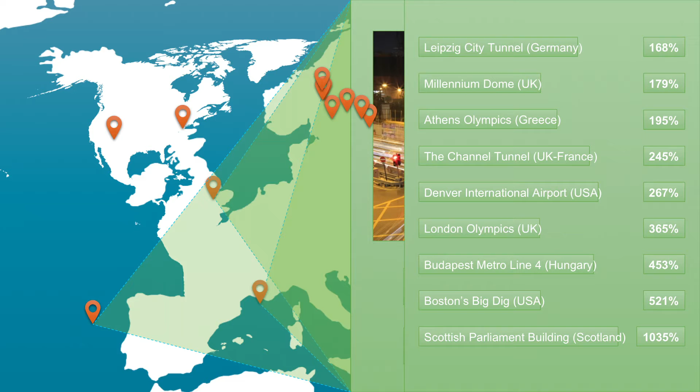This problem is not unique to Canada or the US - it's a global problem. We can see around the world a few examples of projects that are way over budget: Brazil, China, and the list goes on. We'll take a look now at a list across the world - some really incredible budget bust numbers here, and this is just not acceptable. We know that owners expect better from the construction industry.

But things are starting to change, and BIM is driving that change. New technologies available for construction are making new things possible that in the past have been impossible. Today we're here to introduce HxGN SMART Build, the newest BIM construction 4D, 5D solution that brings together models, schedule, and cost all in one pioneering platform that's brand new to the industry. We'll release the solution in about 3 weeks, so you're seeing a sneak peek here today. The solution has 3 pillars.

The 3 pillars are: one is clarity - it's role-based so everybody can see exactly what they should see at any time. Connectivity connects together all parties so that we can see the information that we need to see, all in one single interface.

Simplicity - we're lowering the barrier of entry to BIM by creating a solution that's easy enough for everybody in the entire project team to use, whether it's the owner or the tradesman, but sophisticated enough for the most sophisticated scheduler or cost estimator and project manager to use.

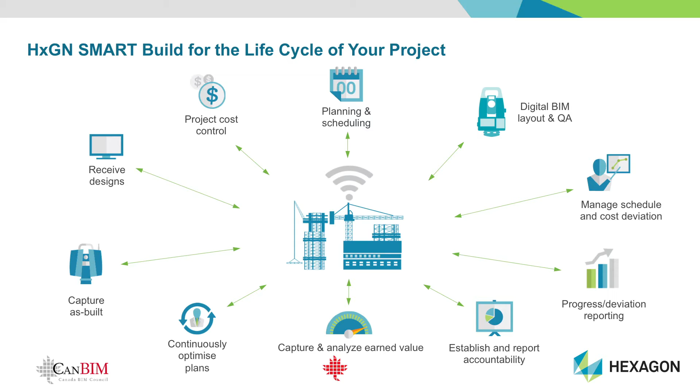Our solution is built from the ground up, brand new technology we're bringing to the market. It's all about using the Internet of Things to connect together all parties so that all information is in one platform so everybody has the information at their fingertips at any time. HxGN SMART Build is a solution for the entire construction process, from early planning to execution, including digital construction layout that's fully integrated, all the way through the handover process.

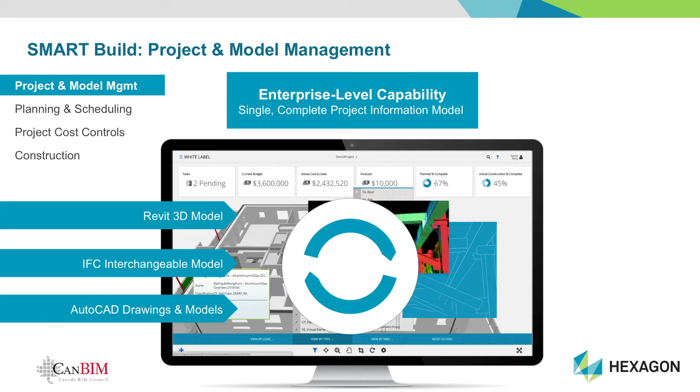Let's take a quick run through a construction project. Phase 1 is pre-construction planning. In pre-construction planning, we consume or import multiple different models into a single environment. Once we have all the information in the same place, that information is combined together, and all the other project information can be brought in as well - whether it's 2D information, Word documents, everything is pulled into the one single same environment.

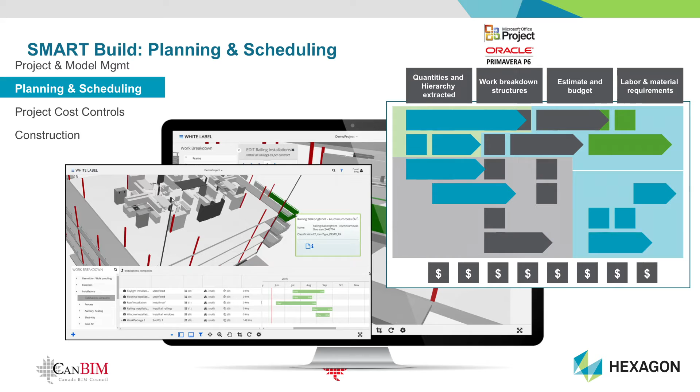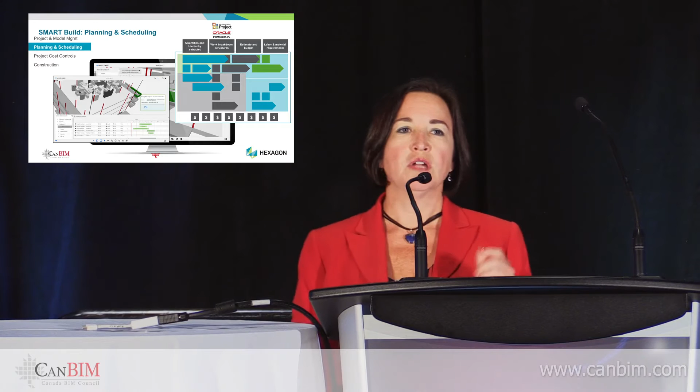The ability to bring everything together in a web-based environment means that everybody has all the information at their fingertips. But because it's role-based, you only have the information that you need - you're not overwhelmed by information that's irrelevant to your role.

And now if we move to the takeoff process during construction, in pre-planning, we have the ability to pull model quantities directly from the model within our solution.

Once you have the model quantities, you can apply formulas. You can use your very own formulas, and we have a database that will manage that process. And those quantities can then have cost applied as well, and we can manage that whole process.

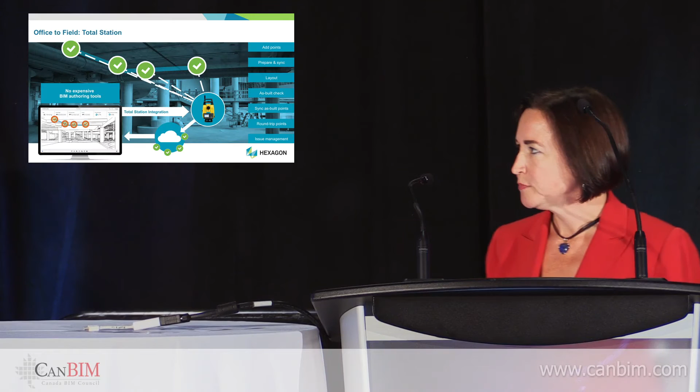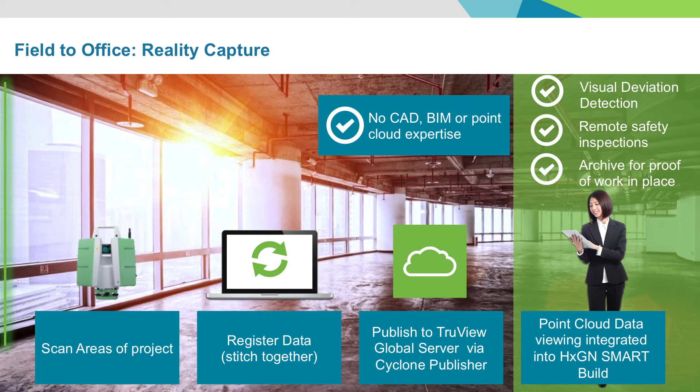And now we can bring in our schedule. You can bring in a schedule from P6, Primavera, or a Microsoft project, or virtually anywhere, even in an Excel file. Now that you have all your information in one place, you can pull together your model elements and schedule elements into what we call a work package.

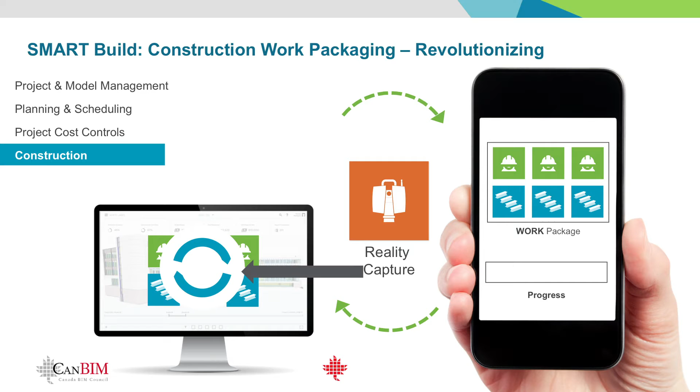The work package is the vehicle that ties together your model elements, your schedule, and your cost in one vehicle that allows you to assign out these work packages. And the work packages are breakdowns of your building, so you can divide it up by floor, area, trade, and then those work packages can be assigned out to the trades, and once we get to the field, they can be statused.

So let's move on to construction execution. Now we're in the construction execution phase, and we have real-time dashboards.

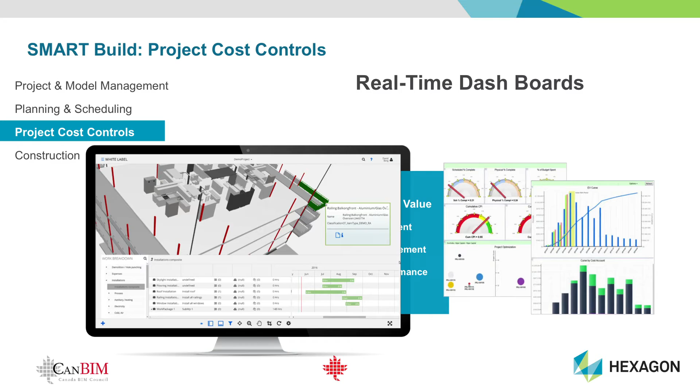As construction is progressing, we can see in our same model environment our earned cost or our earned value. Because we've pulled together in the very same environment your model, your cost, your schedule, we can see earned value on our dashboard in our model view environment.

It's not just a pretty picture, guys. You can click on any of those metrics, those KPIs at the top of the screen, and drill in and get all the information about your project. RFIs, COs, where are we, who's behind, why are they behind?

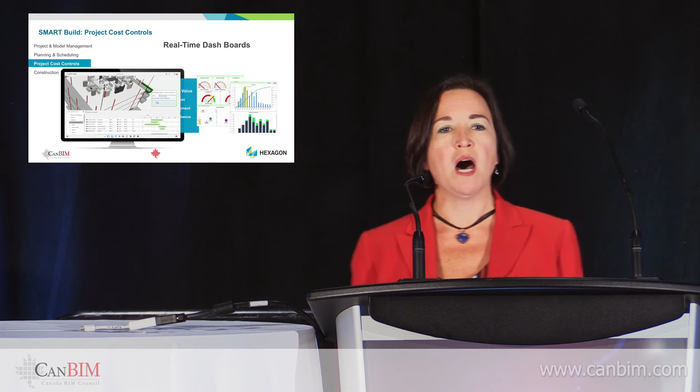So very rich data. We also integrate with digital construction layout. Within our model viewing environment, you can add construction layout points to your models, sync those with your robotic total station software, and layout in the field.

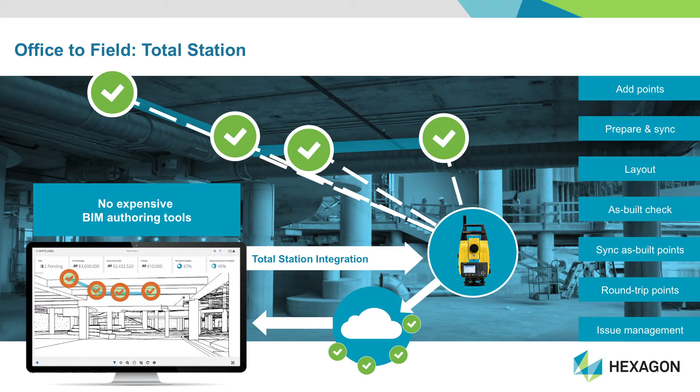And you can also as-built in the field and round trip those points right back into the Smart Build environment with deviation detection. Once you're back in the Smart Build environment, all that information can be shared out with the team with integrated issue management.

As part of our ongoing development, we're also integrating scan data or reality capture data, where this information in the field can be captured and your model information at the same date and time can be exported out and merged together with your model and your scan data, then viewed within this model-based viewing platform, cloud-based, for visual deviation detection, remote safety inspections, or just proof of work put in place.

Now, once we're in the field, we have our work packages generated, they've been assigned out to our trades, and now in the field with practically any mobile device, these work packages can be updated or progressed on a daily or weekly basis. As soon as they're updated in the field, the progress is reported, and that information goes right back to our dashboards, providing project managers and owners with instant information about the status of the project.

Our vision is that moving forward, reality capture will be integrated into this process so that trades will have to provide evidence of work put in place and also the quality of the work with reality capture data such as scan data.

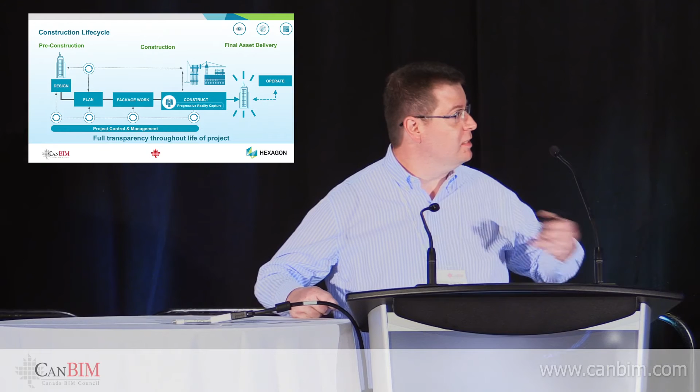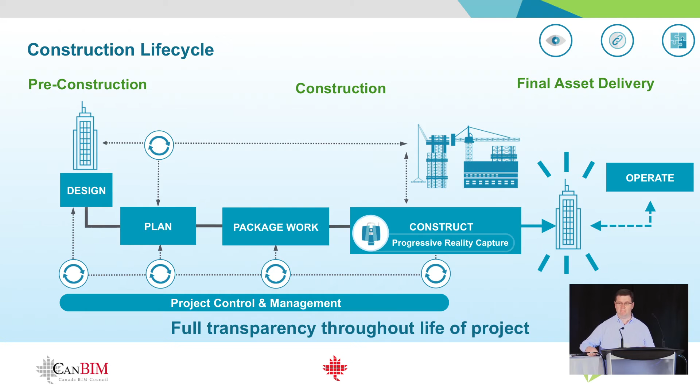Basically that's the diagram of the process that she described, right? So basically you have the design, then you plan, then you create the packages, and you leverage these packages to actually do the construction and track all the progress, right? And once the work is done, you can use that to operate the facility as well, so do all the asset management required. And all that, through all the phases, you see that you have project control and management as well. So you can leverage via the dashboard that she mentioned all the costs and all the tasks or activities that are related to that. Okay, so this is a quick overview of the solution.

So you see on the top here the dashboard, right? So you basically define your KPIs, so you can define your own, right? We're just giving some examples here. And then on the left side, basically really simple icons of the things that you want to do, right? So work packaging, recipes is the idea that you have a library of things that you execute in different projects to reuse, right? So digital layout, documents, tasks and export the quantities, right?

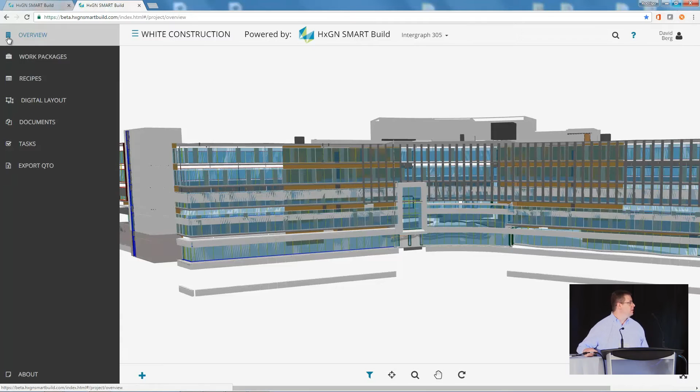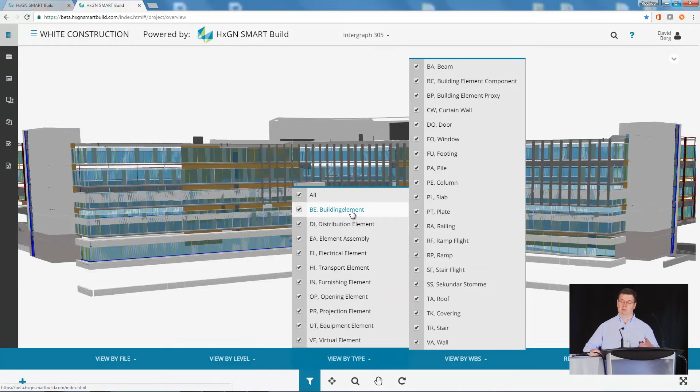On the other bar, you have basically different ways of filtering information, right? So we are leveraging IFC files coming in from the design tools, right? And then we can filter that based on several different things, even custom filters that you can create on your own, right? So some examples here: defining the levels, defining based on the classification of the items, WBS, WBF, so on and so forth, right?

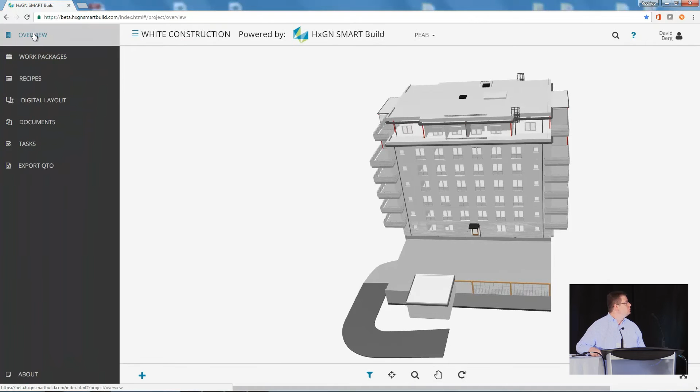So once you have this idea of filtering your model based on specific information, you can now leverage this classification to define your packages, right? So I'm going to the interface that defines that. Basically just setting the environment here. So you see that I have a list of packages based on some classification here, and each of them is associated to a WBS and some items in the schedule. So you can see the planned dates and the actual dates as well, so you can basically track if you are behind or not in some specific activity, right?

So we can also track not only the activity itself, but all the material related to that and labor as well, right? So items that are not in the model, right? So labor required to execute that and material that is not in the model.

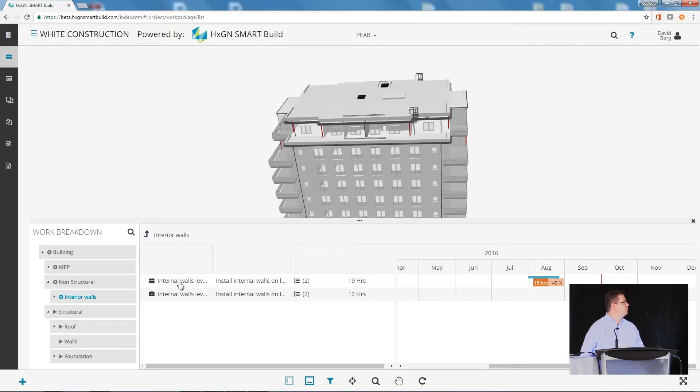So I can drill down to specific areas and go to packages on that, right? So I'm going to the walls here, getting some dates, and then you can see that I have the progress of the specific package, or I can roll up to higher levels to have a more generic, let's say, progress, right? So you see that you have dynamic bars here that we can move according to what's actually happening in the field, right? And as soon as I change something, you see that it automatically calculates the overall progress for that activity, okay?

So I can also define, just give some examples of the properties that I can define here. So for each one of the packages, I can read the schedule, right? Based on Primavera or Microsoft Project or even Excel, right? For each one of the packages, I have all the components, so I can basically graphically select the components or use graphical filters to speed up this process, okay?

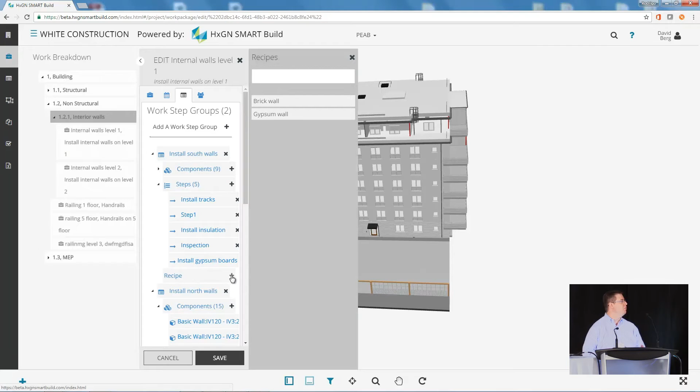Each one of the packages will have a set of steps, so predefined tasks that you have to perform. And one of the things that you can leverage is this concept that we have of recipes, right? So the idea that I've executed that before, so I have an idea what's the labor involved, all the material involved, and I can basically tweak that to improve my process on the later projects, right? So to use that again as a library or a source of knowledge, to optimize the whole process.

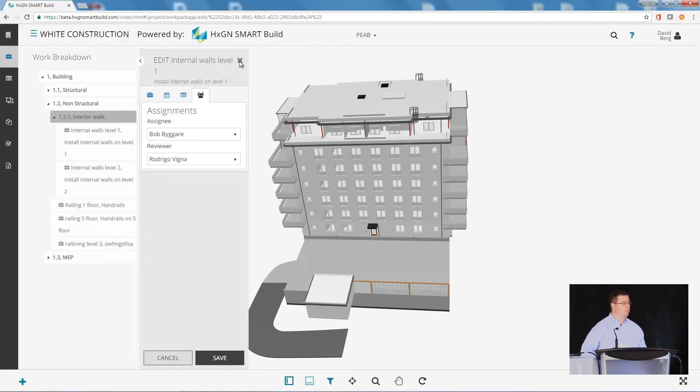We can associate documents into that as well. And we can also say it's a concept of a workflow, right? So basically, a certain user is covering that task. After it's done, somebody else will revise that. So have an internal workflow on how the things will be managed on that process.

Okay, so just showing that again, that I can update my progress and see the values updating on the screen here. Okay, so as soon as I update that, it'll basically update and recalculate the overall progress for that activity.

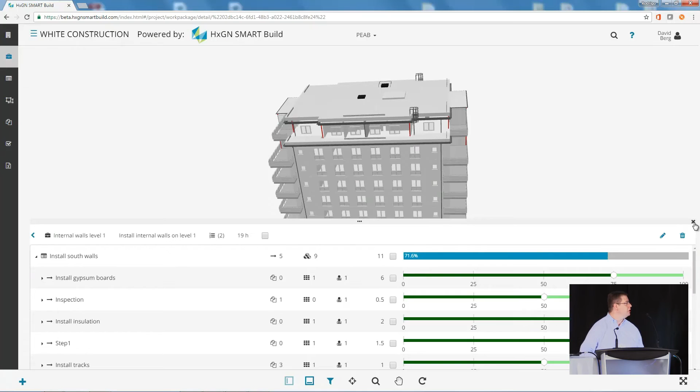Implementation-wise, you see that the solution is running on a browser here, right? So it's what we call a zero-footprint solution. So you don't have to install any plugins or any applications in that, right? So it's just the browser here, going to a cloud solution database that it's putting all this information together, right?

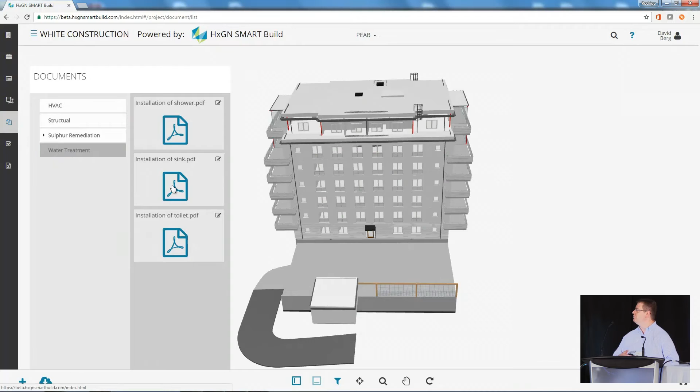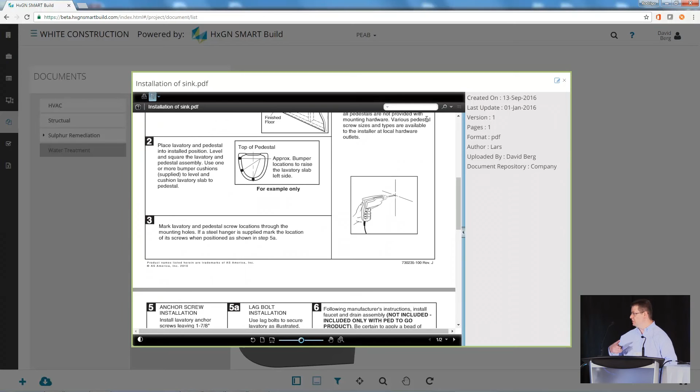Another aspect we can handle is a universal viewer for documents, so it doesn't matter which format you're using, we can bring that into a viewer and you can do redlines on these files. It's an easy way to collaborate with multiple users, and all these redlines will be available to everybody that has permissions. They're what we call non-destructive comments, a layer on top of the file, so you can turn them on and off to see the original file if you need to move away the comments.

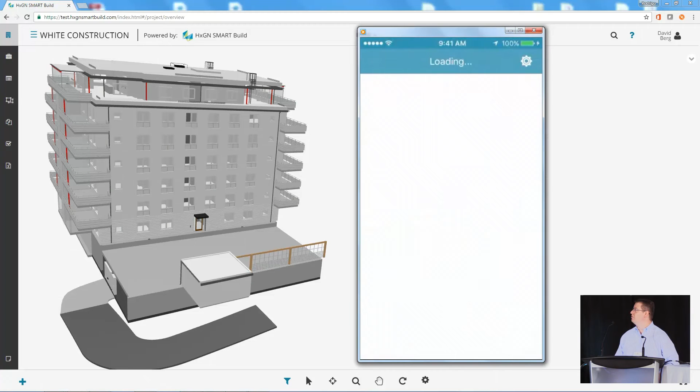This solution is also available on a mobile device. I'm putting that side by side so you can see exactly the same information available in the full solution is available on mobile as well: visualization of the model, the work packaging solution, filtering the model, turning things on and off based on filters, viewing the documents, and doing special settings if you need to.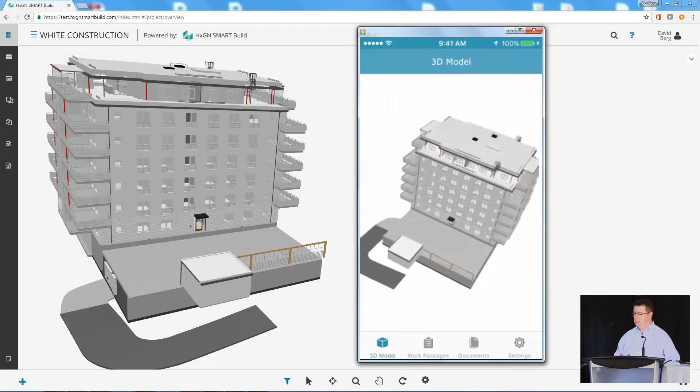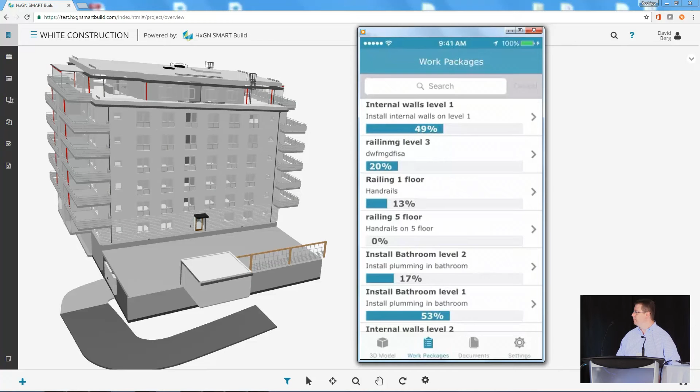The key point of this solution is giving the field the chance to dynamically update the progress, so instantaneously you see in the office how the project is going. Just by updating a specific package, it will roll up and recalculate the progress for the whole project, and you have it available everywhere you have access to the solution. You can manage labor, materials, and the activity itself, and even have a version of the document viewer available on the mobile device.

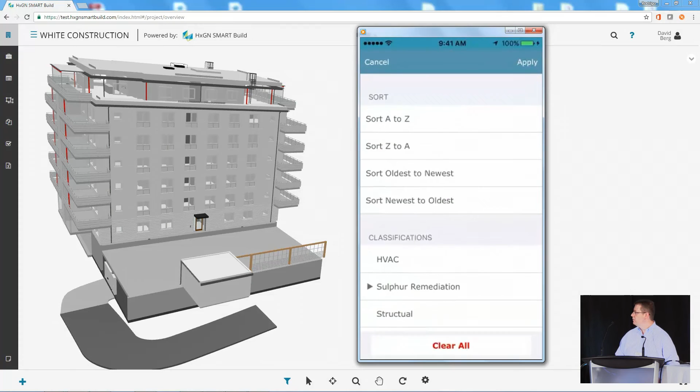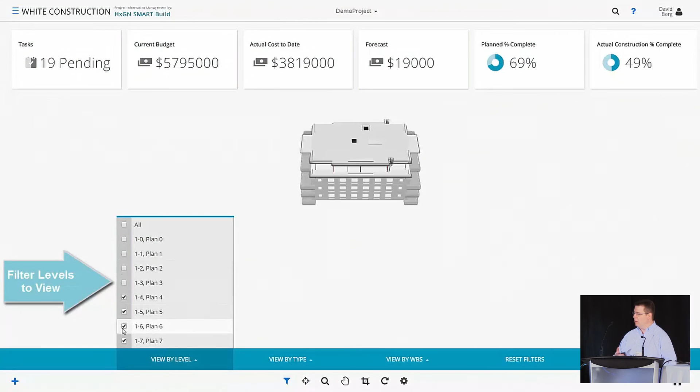The other key point of the solution is integration with the physical environment. We have integration of total stations, so you can create points in the model and export these points so the total station can use them with smarts on it—not only graphical information but also data information you can leverage during total station usage, and then bring these points back.

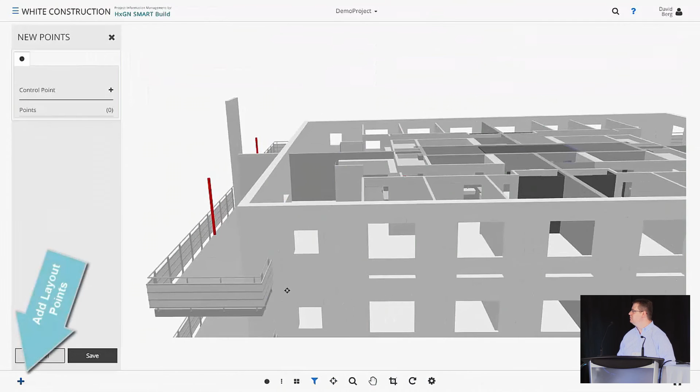What I'm doing now is creating new points in the solution, dynamically placing them and choosing the attributes I want to bring together with these points. These points are color-coded, and you'll see later that the colors represent how the points were created and how they were actually captured in the field.

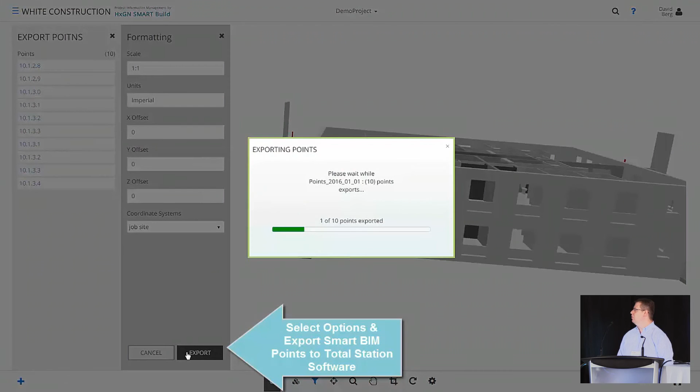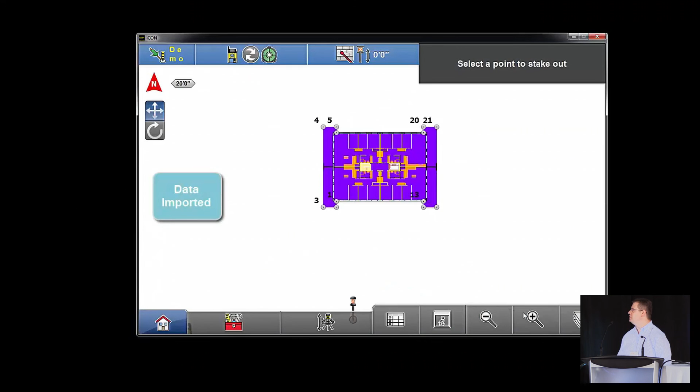Once I create the points, I move to the total station and import them, in several different formats like XML or text files. One important aspect is not only the XYZ coordinates but also attributes you can define to help your validation process. So I'm importing points here, and it goes through the whole process of identifying the points on the total station, classifying them in different ways for how we're going to import the file.

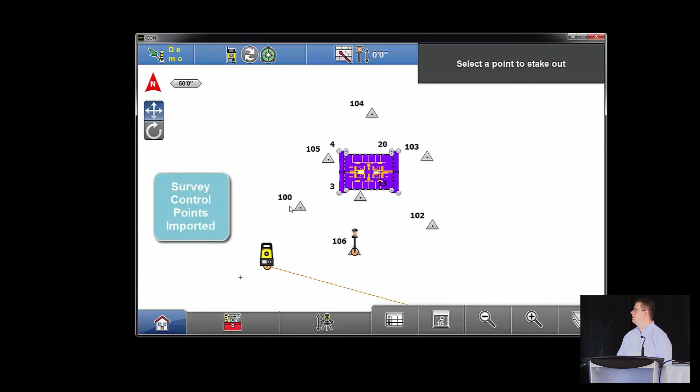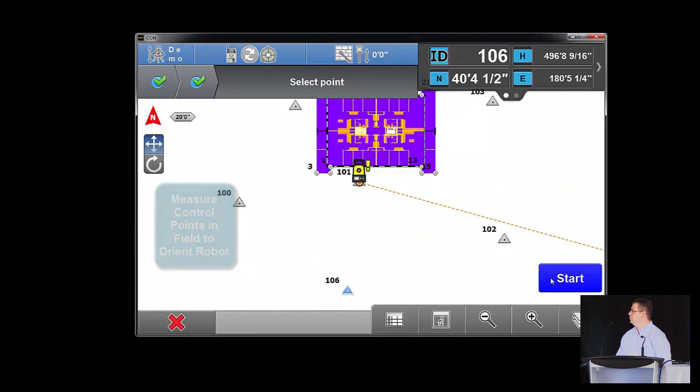You see that the model we're looking at here is exactly the same model I had in the Smart Build solution before. You can use that, since it has its own software to calibrate these points and start the process, which will guide the robotic total station to do all the work.

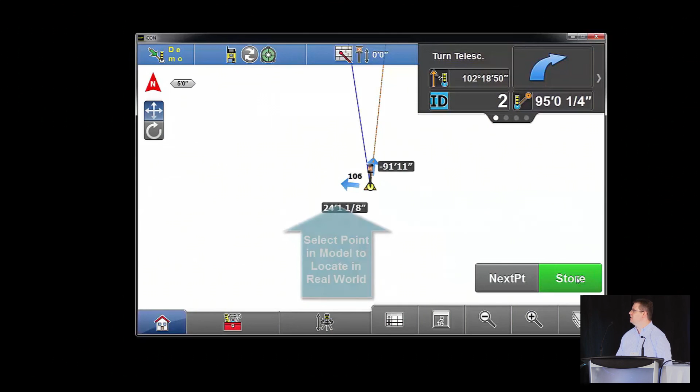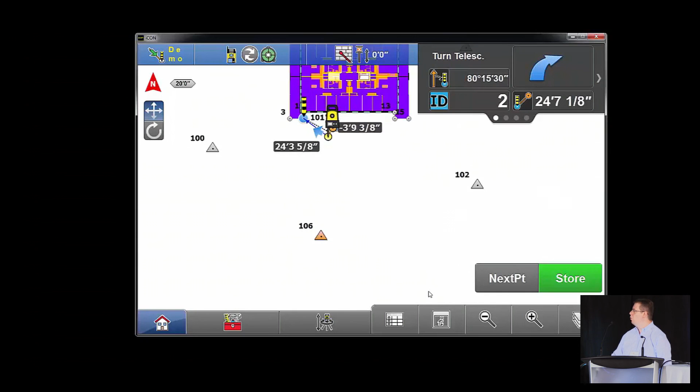It selects points, locates them, and gives precise information about each one that was imported. The software guides you through the process, showing where you have to move and how you need to position things to make it easier, helping you adjust the physical location to where it needs to be.

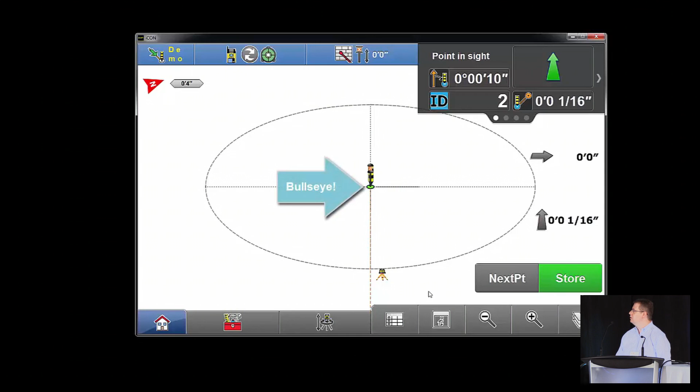Once it's done, it starts storing the points, basically going point by point and repeating the same process. I can have a split screen so I'm doing the positioning of the total station against the activity that's actually being done, and then I can use the visualization tool to actually see the points.

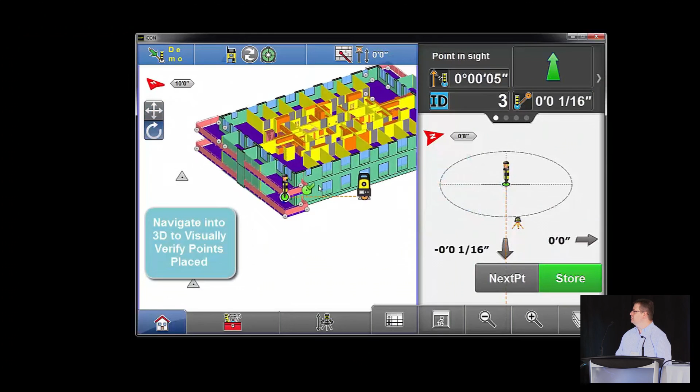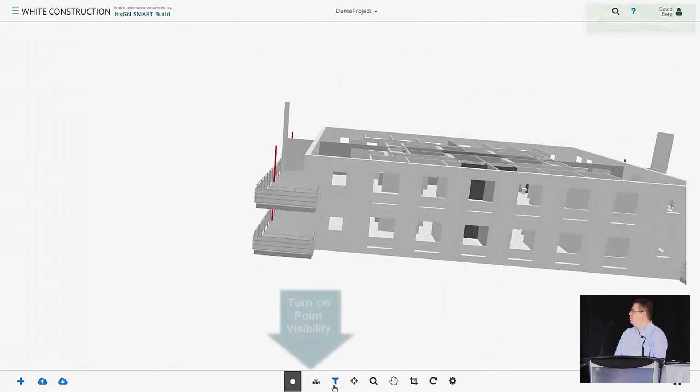Now is the phase where I'm bringing it back to the Smart Build solution, importing these points from the robotic total station back to HxGN Smart Build. I turn on the visualization of the points, and you see two different colors: the blue one is the original one I placed, and the orange one is the deviation. That's basically how we integrate the model with the physical aspects of it.